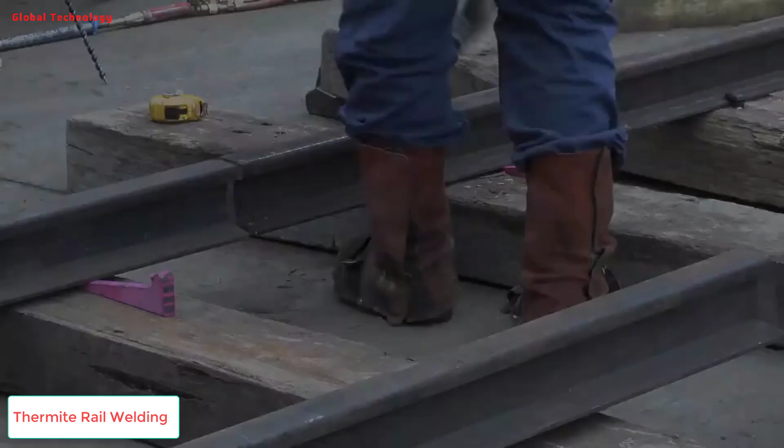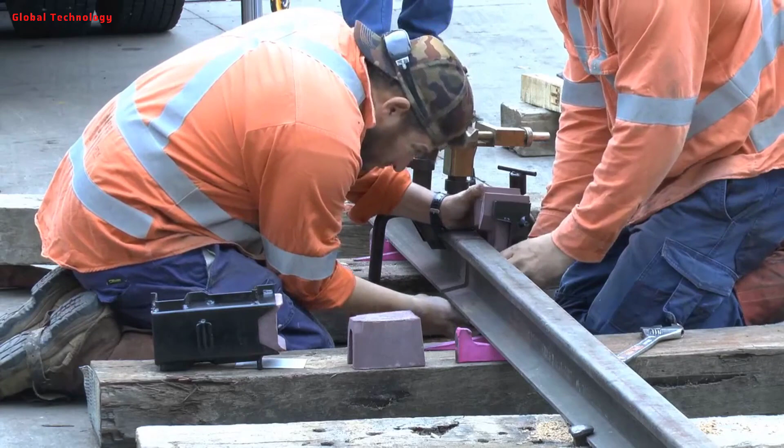Thermite rail welding for rail connection. Thermite welding is a chemical welding process in a liquid state through which the joints are formed in molten state. It combines the process of welding and casting in which the molten iron is poured at the welding plates so that it can form a permanent strong joint.

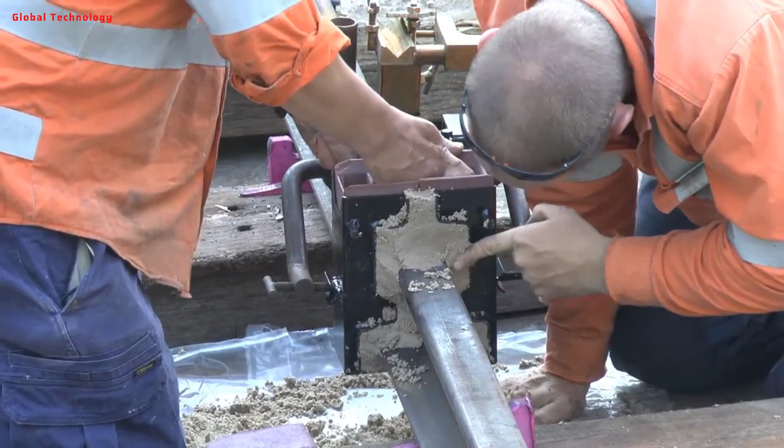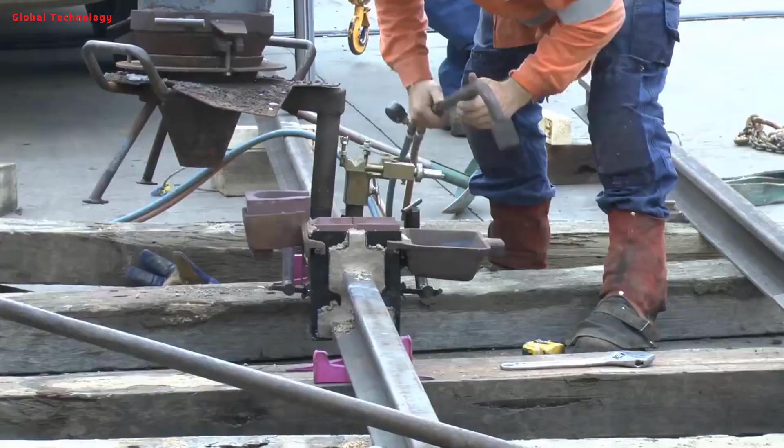The reaction involves the combustion of thermite, a mixture consisting of finely powdered aluminum and iron oxide in a weight ratio of approximately 1:3. While the reaction can reach a temperature as high as 3,000 degrees Celsius, preheating the thermite mixture to around 1,300 degrees Celsius is required to initiate the reaction.

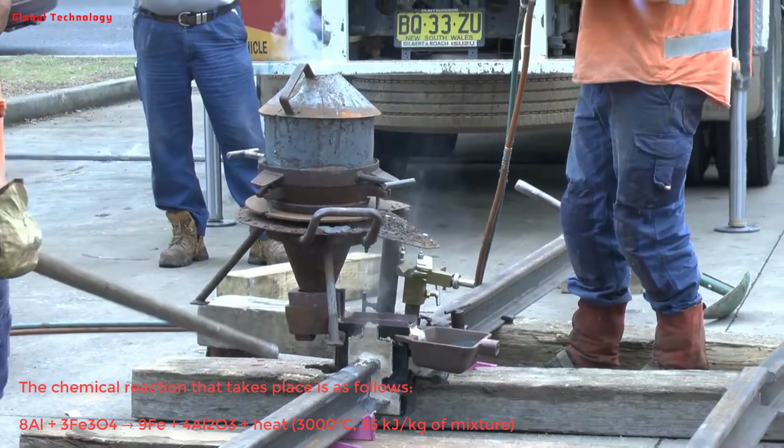Aluminum has a strong affinity for oxygen and thus reacts with iron oxide to produce pure iron and aluminum oxide slag.

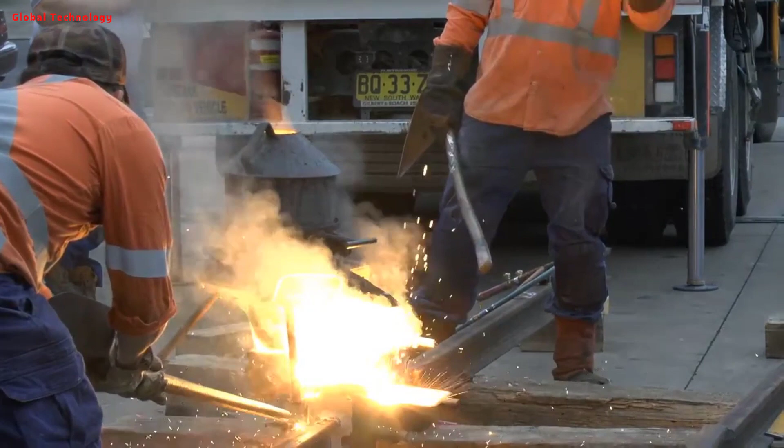The slag, in the form of aluminum oxide, floats on top of the molten metal pool, while the pure iron or steel settles below due to the significant difference in densities.

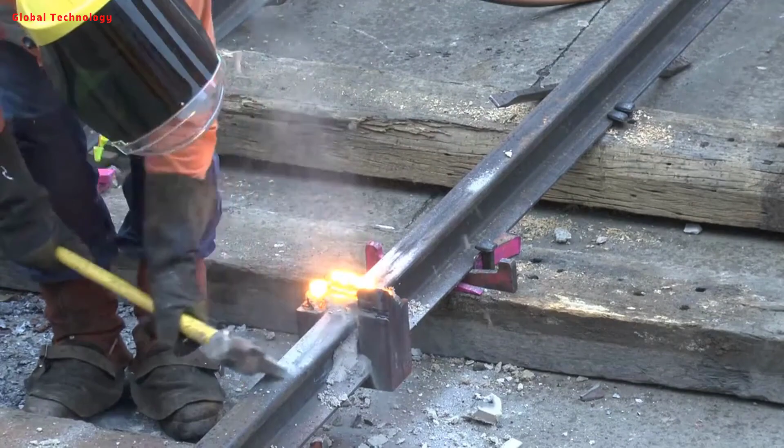Thermite welding is a straightforward and rapid method for joining similar or dissimilar metals. It offers cost-effectiveness as it does not require expensive power supply equipment. It is highly versatile, making it suitable for applications in areas where power supply may be inaccessible. Thermite welding creates strong, durable joints with excellent metallurgical bond.

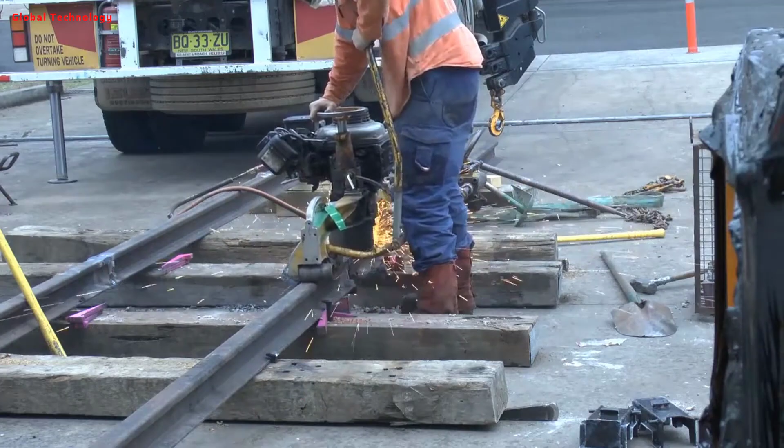Flash butt rail welding for rail connection.

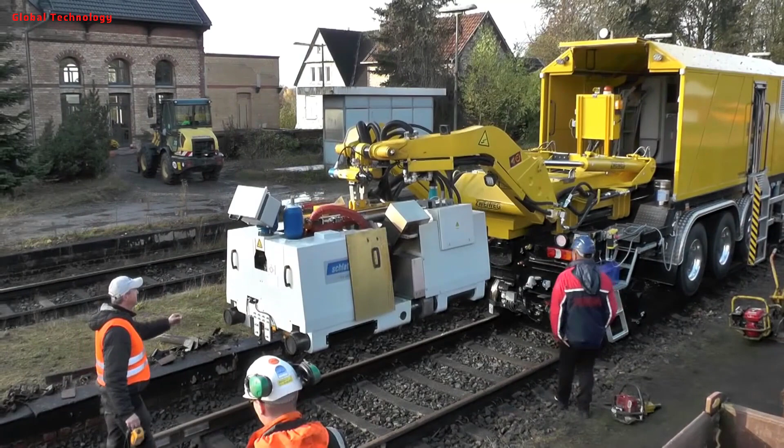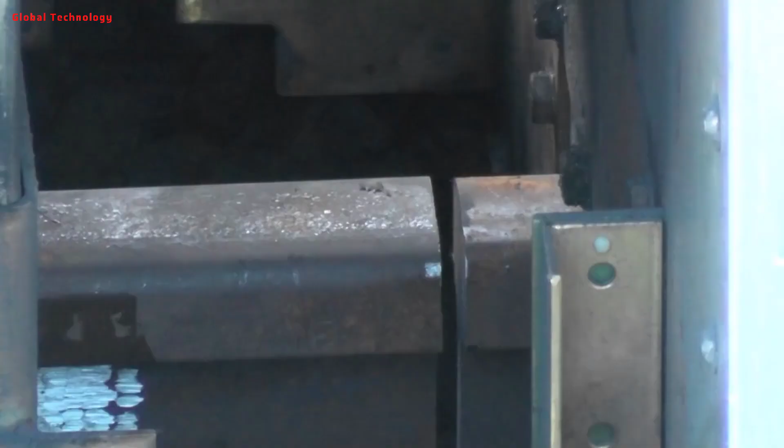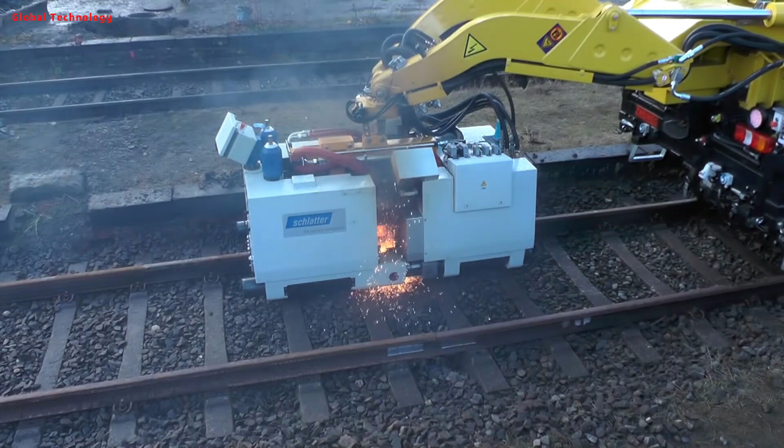When flash butt rail welding method is used to weld a rail, the first step is to place the two rail heads opposite each other. Connect the power supply to make the cross sections of the rails close to each other and reach local contact. And these contact points are heated by resistance heat to produce a flash so that the end faces are all molten. When a predetermined temperature is reached within a certain depth range, then quickly apply the forging force to complete the rail weld.

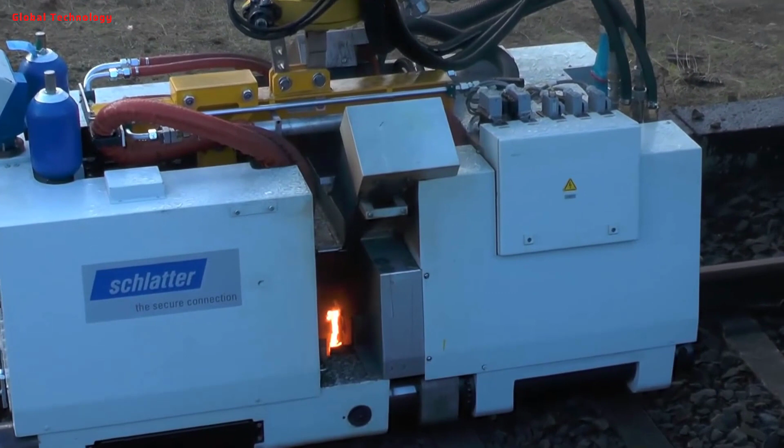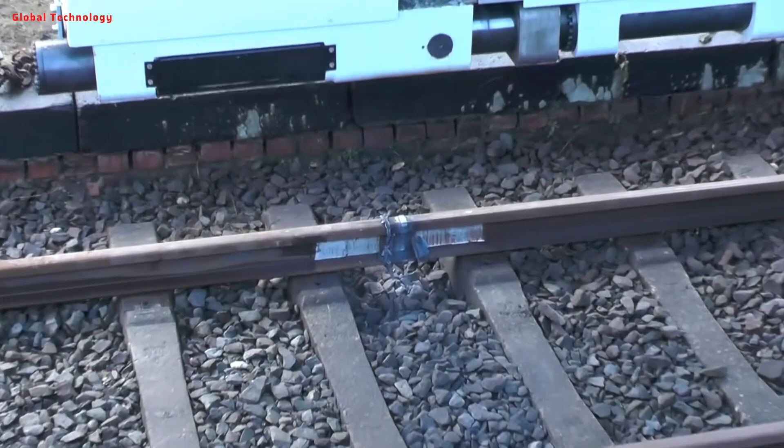Flash butt rail welding has the characteristics of high automation, stable process, and excellent welding quality. The welded joint of the rail is compact forged structure. The joint toughness is good. The mechanical properties are close to the steel base metal, and the production efficiency is high.

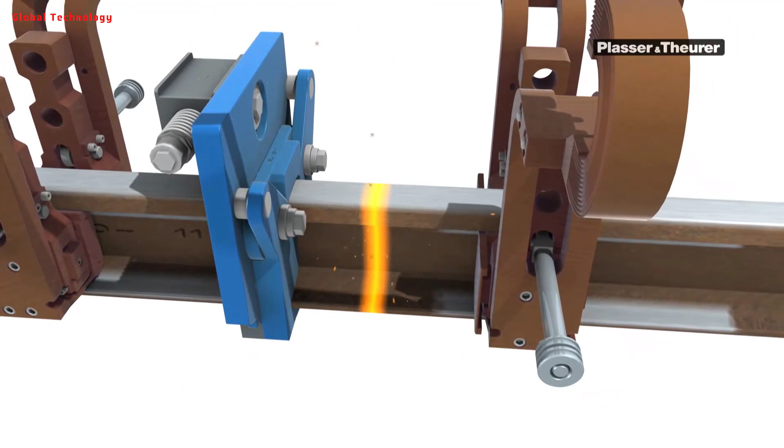Disadvantages of flash butt rail welding. The flash butt rail welding machine is expensive. The one-time investment is large, the equipment is complicated, and it needs to be equipped with high-power power supply and diesel generator set.

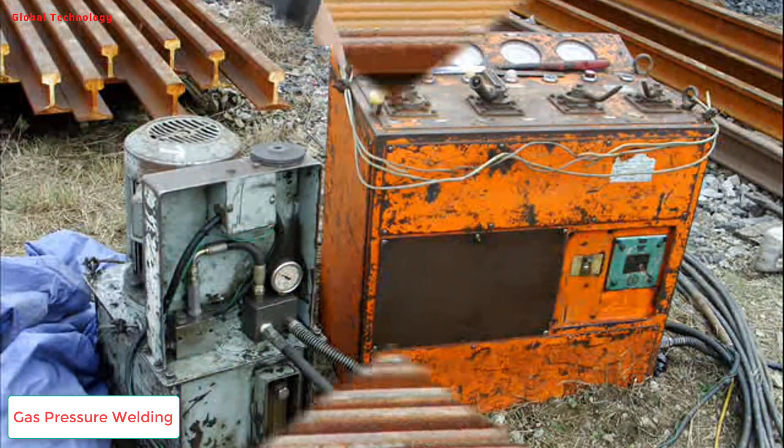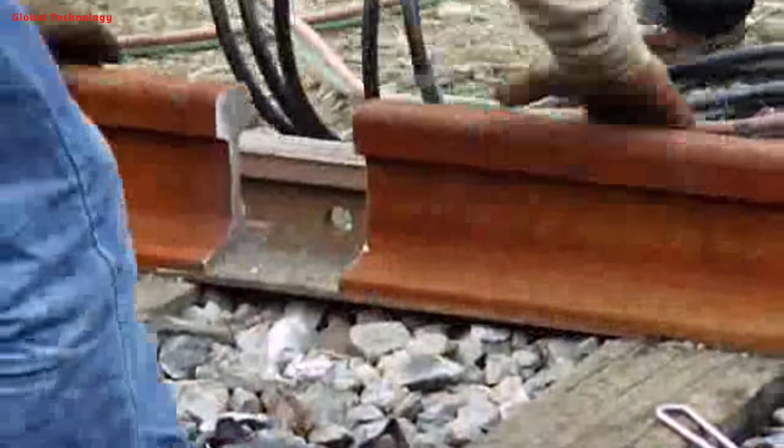Gas pressure welding rail method. Gas pressure welding rail is to use the heat energy generated by the gaseous fuel to heat the end of the rail to be in a molten state or a plastic state, and then apply a certain upsetting pressure to complete the rail weld.

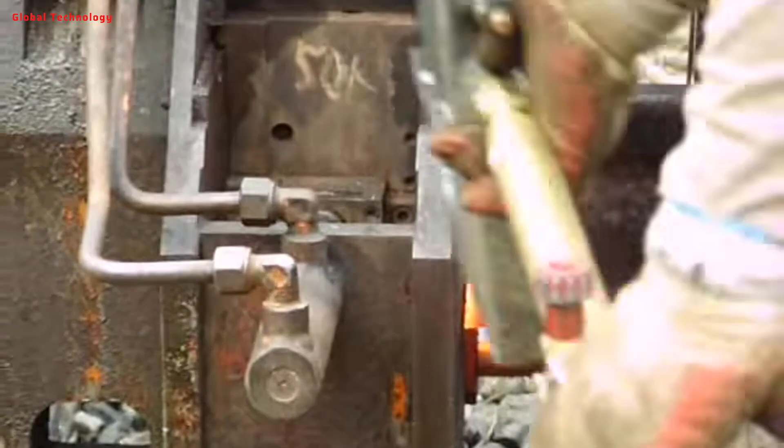Advantages of gas pressure welding rail. The welded joints are also compact forged structures. It is mainly used for on-site joint welding. The steel rail burning loss is less, about 30 millimeters shorter on average.

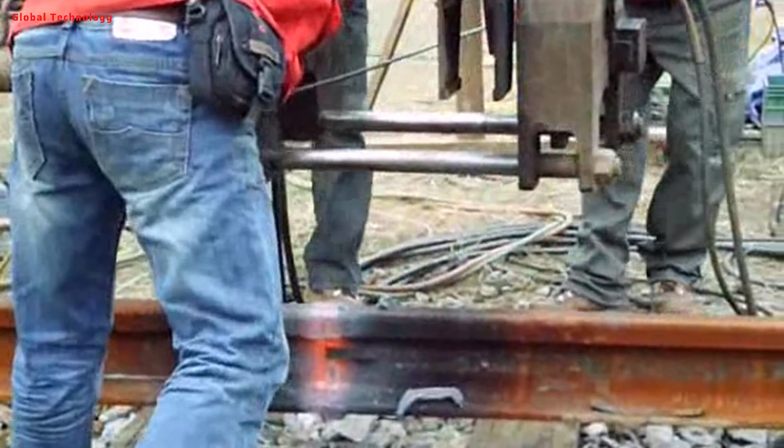Disadvantages of gas pressure welding rail. The gas pressure welding requirements of the joint section are very strict during welding. The welding process is affected by many human factors, and the joint quality fluctuates greatly and is difficult to control.

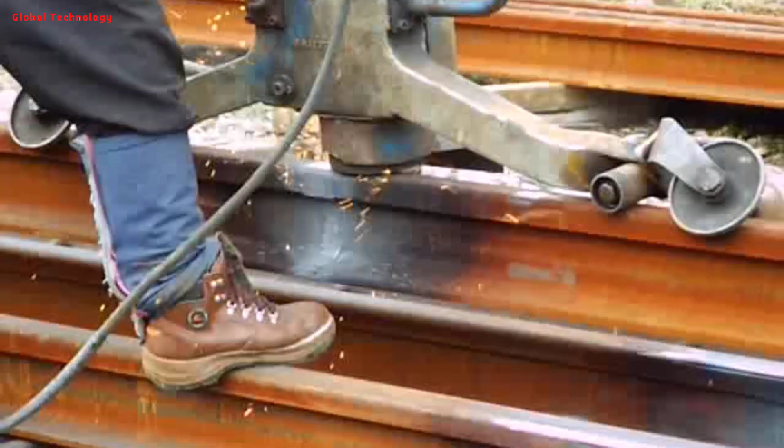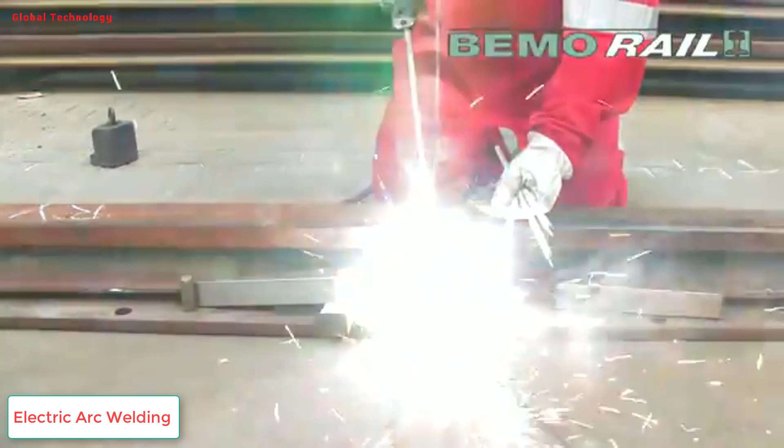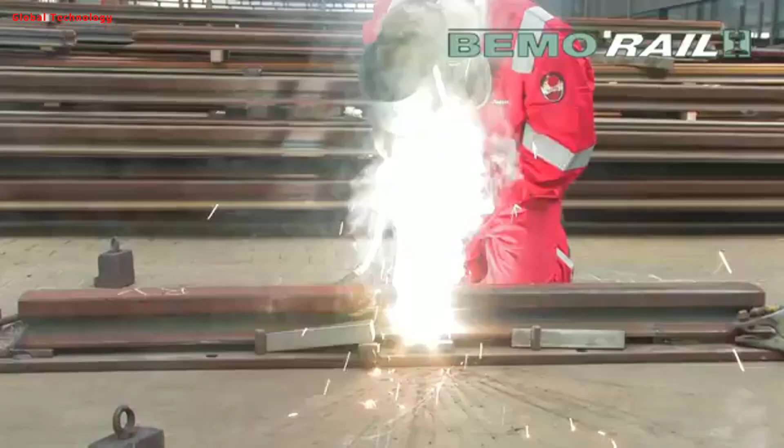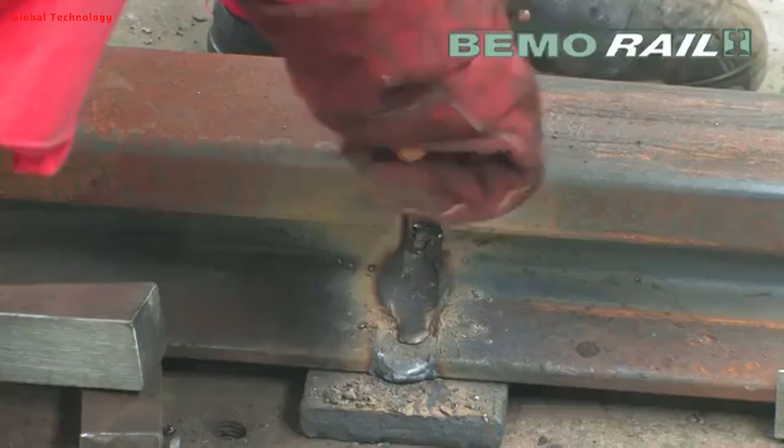Electric arc welding railroad. Electric arc welding railroad is to use welding rod or welding wire to melt steel rail by the arc heat generated on end faces and fill the joint gap and force their ends to get the needed form with copper stop. After cooling, it will form to be a welded joint. It is a melting welding method.

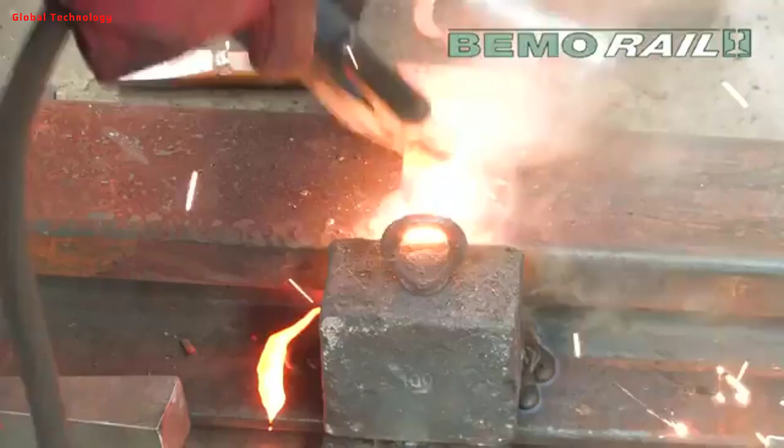Advantages of electric arc welding railroad. With suitable welding rod and wire composition, the electric arc welding railroad joint part can obtain bainite structure with excellent performance. The comprehensive performance of welded rail joint part can reach the level of base metal, and the tensile strength and wear resistance sometimes exceed steel base material.

Disadvantages of electric arc welding railroad. At present, the electric arc welding railroad method has been less widely used, and the welding process and technical level are strict.